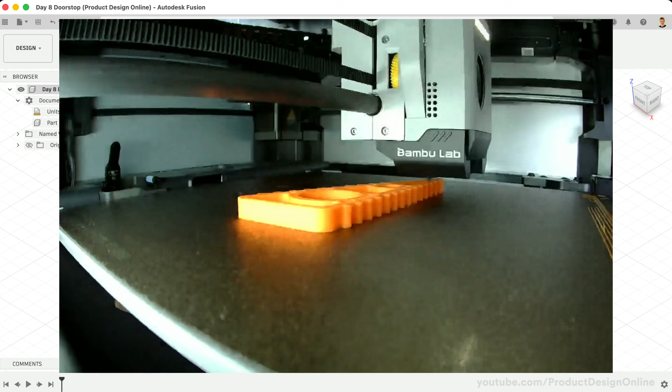When designing for 3D printing, always consider the orientation of your design. In our case, we'll print the doorstop on its side to allow the inner cavity to print without support material. Start a new sketch on the XY origin plane as you'll create the doorstop lying on its side.

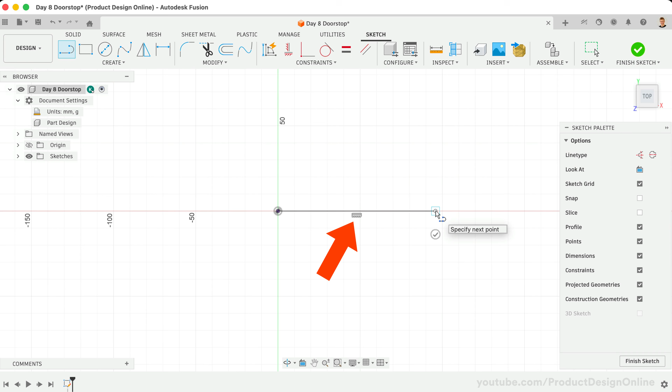Activate the line tool and start at the center origin. Sketch the first line running to the right and click where it snaps horizontally without defining a dimension. Sketch back to the green Y-axis. Notice if you start near the origin and move your mouse upward, Fusion helps you snap vertically from the origin. Click to place this line. Then click the origin to sketch the third line of the triangle.

Take note of the two automatic sketch constraints applied: a horizontal constraint on the first line and a perpendicular constraint at the corner. If you don't see these, manually apply the constraints.

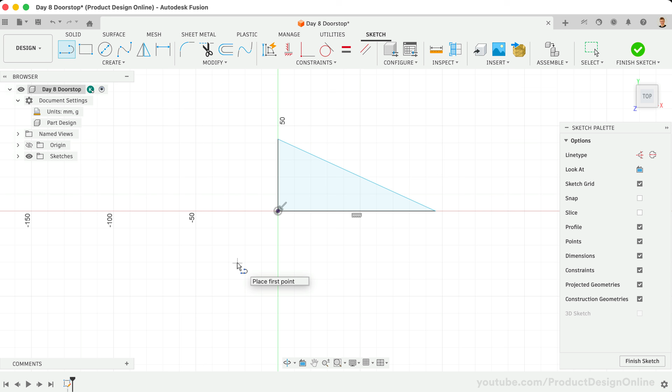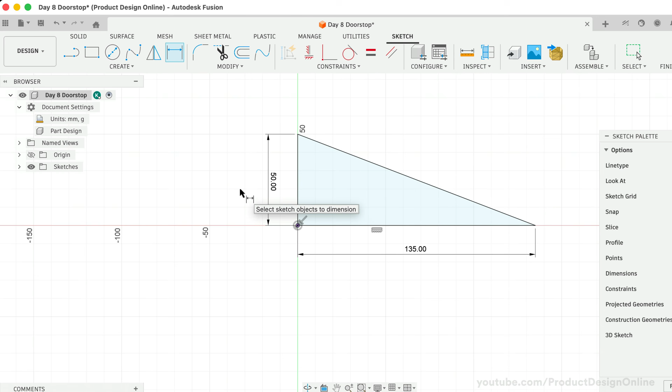Let's now fully define the sketch with dimensions. Press the shortcut D for dimension and select the bottom line. Click to place the dimension and define the length of the doorstop as 135 millimeters. Add a second dimension to the left, defining the overall height as 50 millimeters. The sketch is now fully defined. Double-check by finding the red lock icon in the browser.

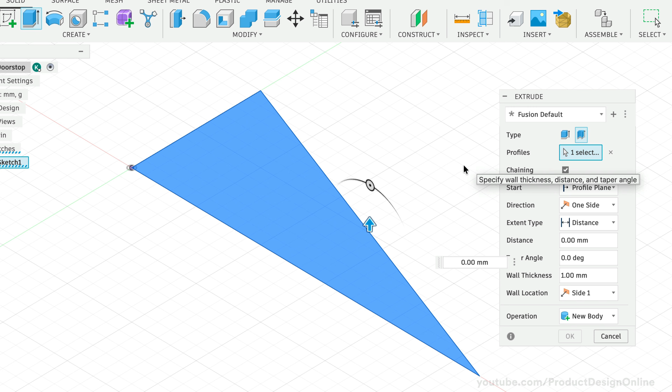Press the shortcut E to activate the Extrude tool. In the previous days of this course, you extruded closed profiles and shelled them to hollow them out. Today, switch to the Thin Extrude option in the dialog. Thin Extrude acts as a shortcut for creating walls or shelled structures. It transforms a simple 2D profile into a 3D feature with a defined wall thickness in one single step.

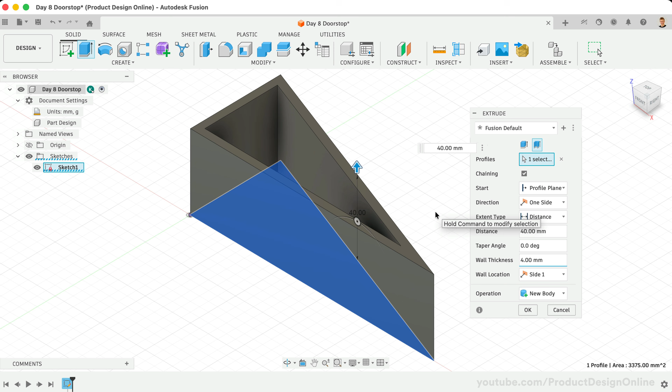Define the extrude distance as 40 millimeters. Notice the Thin Extrude includes a wall thickness in the dialog. Update the wall thickness to 4 millimeters. This provides a nice 3D printed wall thickness that resists breaking if someone steps on the doorstop. Click OK to save the extrude.

Notice you created the overall doorstop shape with a single sketch and single extrude versus using the shell command after the extrude. Use Thin Extrude for quick, simple walls built directly from a sketch, but stick with the shell command for complex 3D shapes where you need a uniform wall thickness across multiple faces.

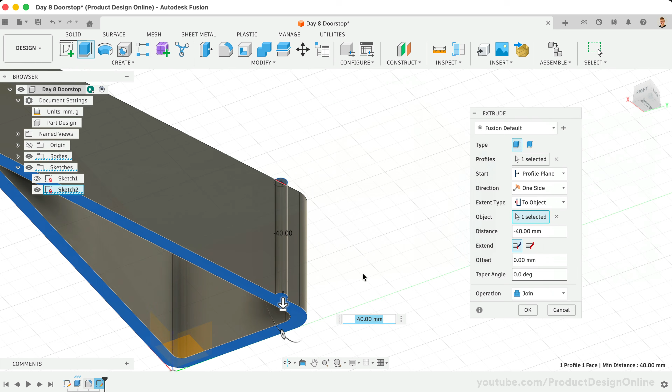To make the doorstop more usable, we'll sketch a grip on top, followed by the pattern on path to wrap it around the triangle. Let's first round over the sharp corner edges to create a continuous path to follow.

Activate Fillet from the toolbar and start by selecting the two inside edges on the left side. Rotate the model if it makes it easier to select the edges. Type 3 millimeters for the fillet radius. The fillet dialog allows you to add different fillets within the same tool.

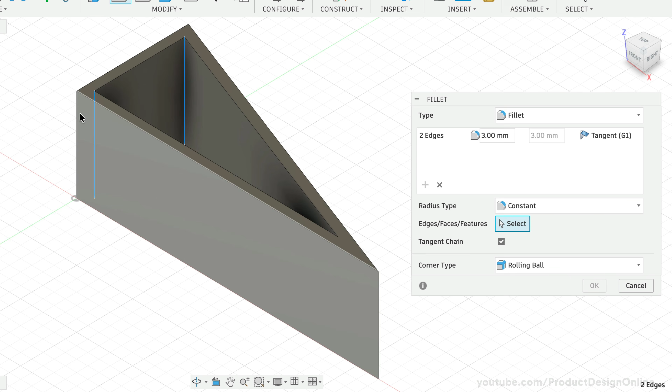Select the plus symbol to add a new selection set. This allows you to select the outer two edges separately, defining these as 6 millimeters.

Hold the Command key on macOS or the Control key on Windows if you happen to select the wrong edge or face. This allows you to deselect or select additional edges. You can also toggle between selection sets in the dialog.

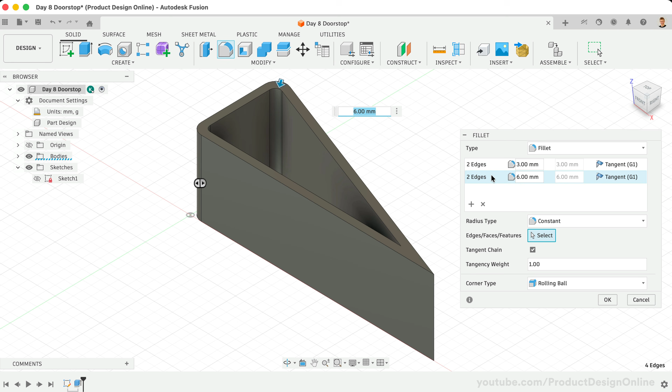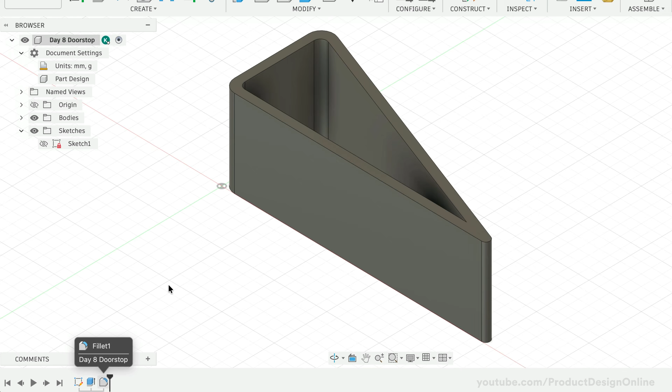Add a final selection set, selecting the front edge of the doorstop. This time, define a fillet radius of 2 millimeters. Click OK to save the fillet. Notice you have only a single fillet in the parametric timeline. Selection sets help you define multiple fillet radii without the need to use fillet multiple times.

Let's now sketch the first grip shape. Right-click on the top planar face and select Create Sketch. Activate the Circle tool from the toolbar.

Click anywhere out in space to start the circle and define the diameter as 4 millimeters before pressing Enter. The circle will still move freely.

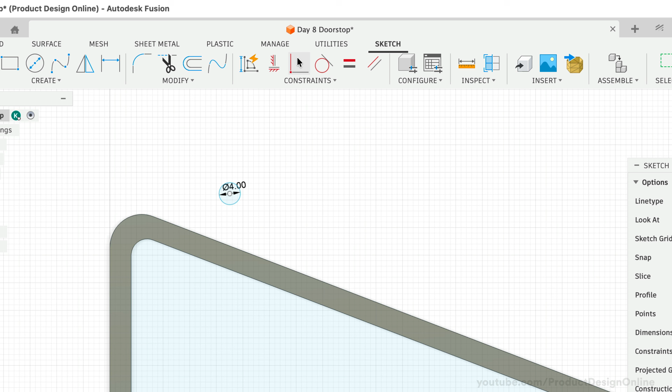Activate the coincident constraint. Use this to force the circle to snap to the top edge of the doorstop. Select the center point, followed by the top edge of the 3D body. Press Escape to clear the coincident constraint. Click and drag the circle. Notice the coincident constraint forces it to stay on this edge, though it still moves freely along the edge.

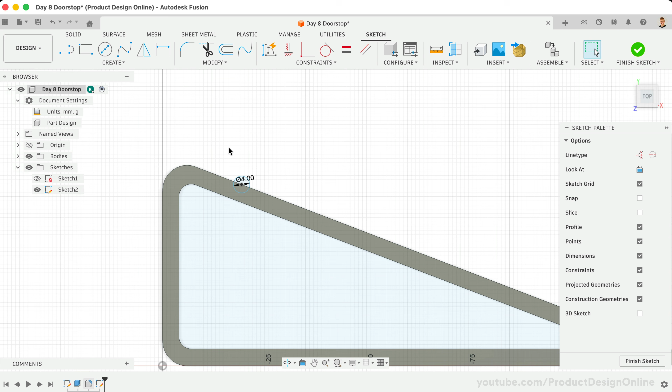Use the Sketch Dimension tool to fully define the sketch. Activate Sketch Dimension and click the center point of the circle, followed by the starting point of the top edge. Click to place the dimension and define the distance as 7 millimeters. You now have a fully defined sketch and don't have to worry about it moving.

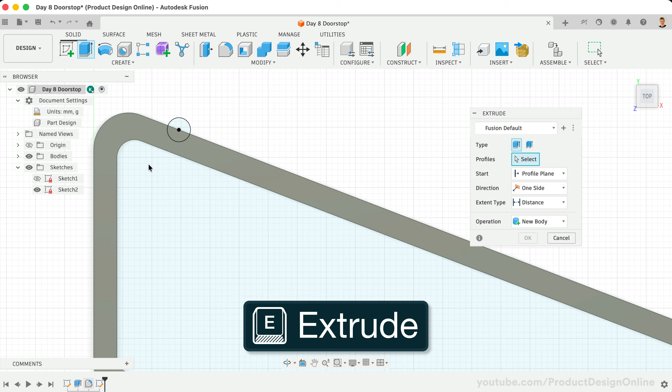Press the shortcut letter E for Extrude and select the top half of the circle. The 3D body automatically splits the circle profile in half.

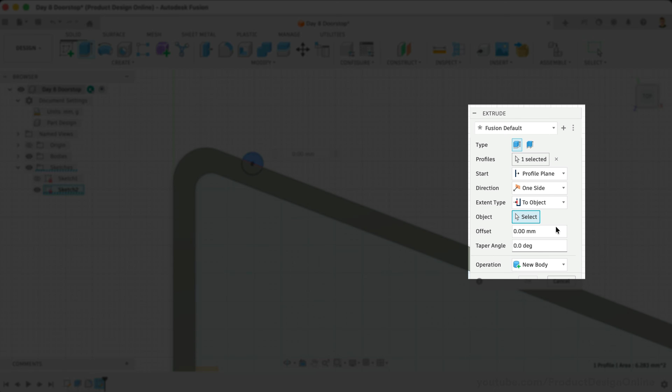When designing parametric models, there are many small settings that will help you build intelligence into your model. Here's a best practice in Fusion: instead of simply typing out the height of 40 millimeters, set the extent type as To Object. Rotate the model and select the opposite face as the object to extrude to. The second extrude feature then automatically adapts if you change the height in the first extrude.

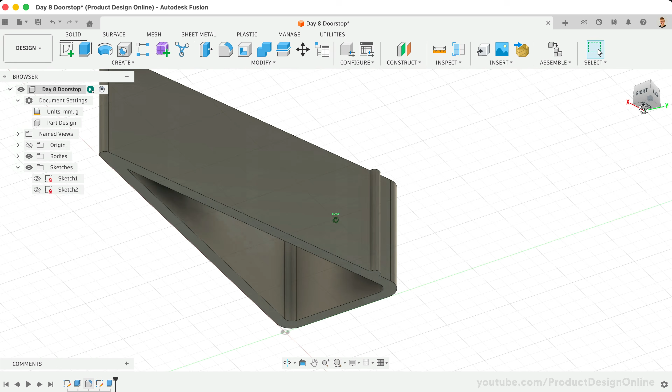Take note of the operation being set to join the existing 3D body before you click OK. Double-click the first extrude and change the height.

Notice the grip on top automatically adapts. Press Undo to revert the change. Activate the Rectangular Pattern tool from the toolbar. In the dialog, switch to the Pattern on Path type.

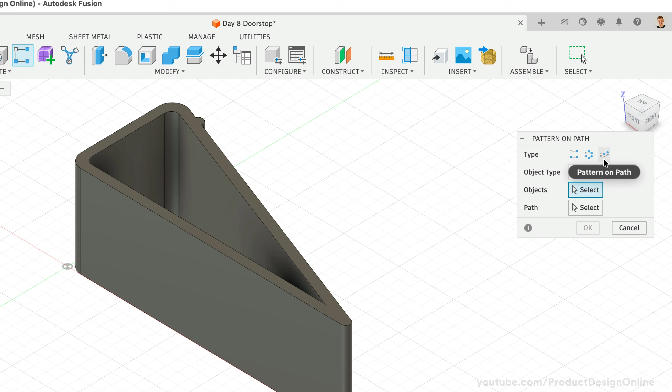This allows you to define an object and pattern it along a path, such as the outer contour of the triangle. Because you set the grip texture to join the existing 3D body, use the Faces object type. This will allow you to select the outer face of the grip. Switch to the Path selector and select the outer contour as the path. Click and drag the directional arrow to pattern the faces along the path.

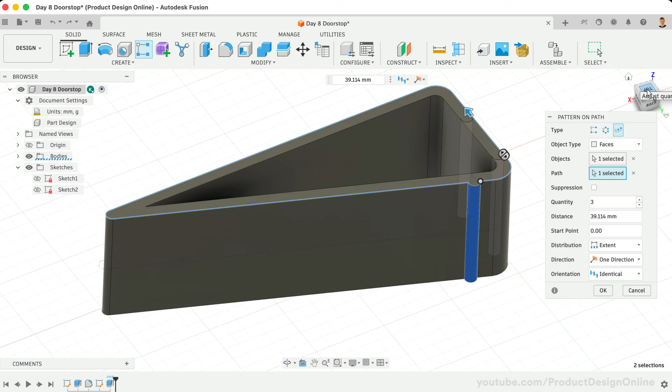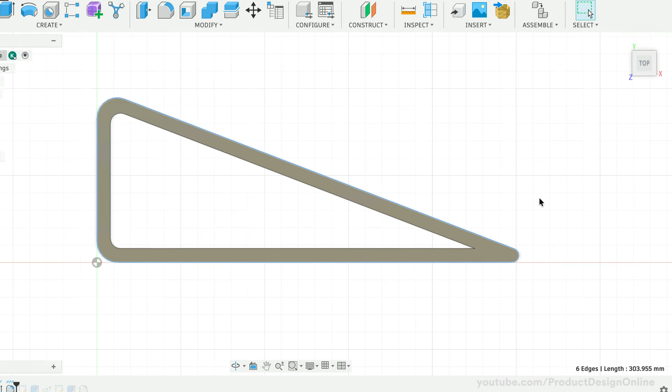This type of pattern often takes some trial and error to find the right numbers. Define the quantity as 40. With the distribution set to extent, define the entire length of the path. Here's a pro tip. You can find the length by shift-clicking all the path edges before you enter the Pattern tool. Fusion will then display the total length in the lower right corner. The total path distance is 303.955 millimeters. Notice the faces currently all match the original.

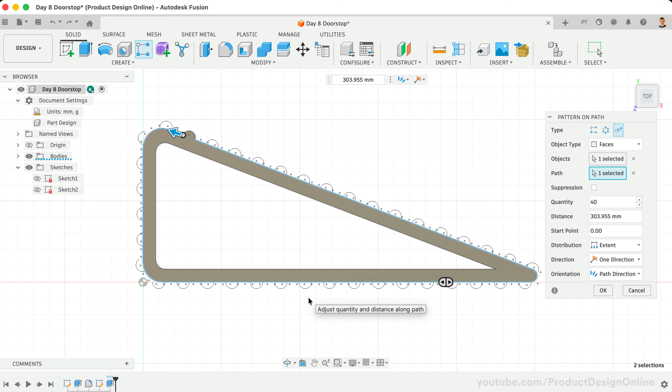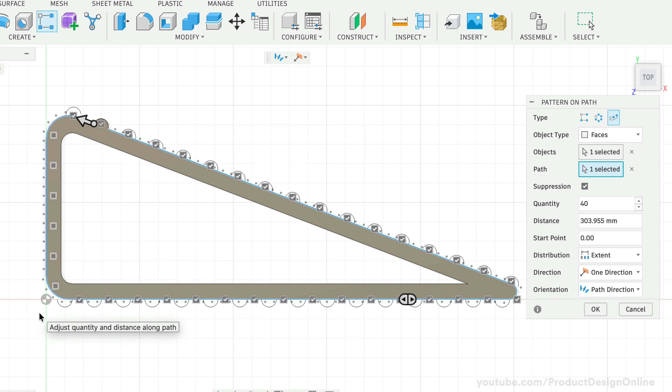To make them follow the path, switch the orientation from identical to path direction. This forces the object to follow the contour of the path. Here's another pro tip. Check the Suppression option in the dialog, as you don't need many of the patterns, including those on the height of the doorstop. This allows you to uncheck any instances that you want to exclude. Take a minute to uncheck all of them on the left side. Uncheck the ones that are too close to the corner edges as well. Click OK to save the pattern.

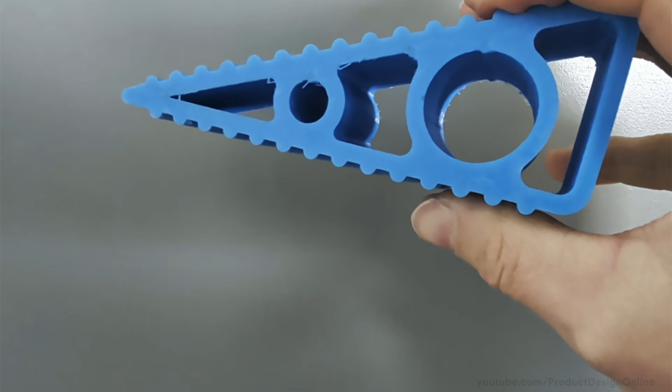A quick note: this design works best if you print it in TPU filament. Its unique combination of flexibility and high friction allows it to grip smooth floors while also absorbing impact without cracking. Experiment with the grip shape, using rounded shapes for hard floors or sharp triangles for carpet.

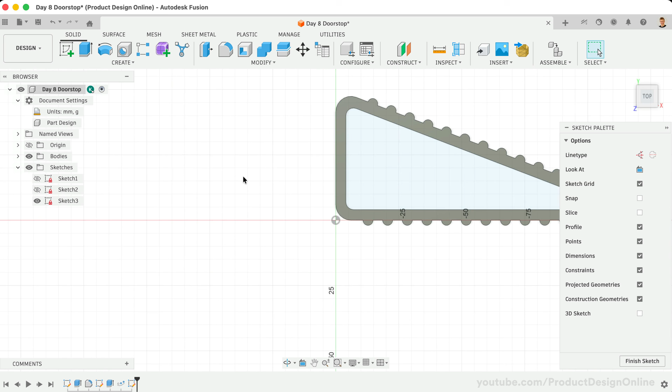Let's now add some final structure to the inside cavity. Right-click on the top face and select Create Sketch. Activate the Circle tool. Sketch a large 30 millimeter circle anywhere on the left. We'll constrain this in a second. With the circle still active, create a second circle with a diameter of 15 millimeters, clicking to place it anywhere on the right.

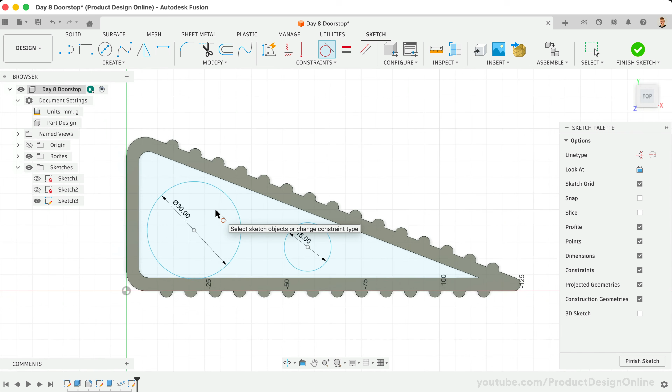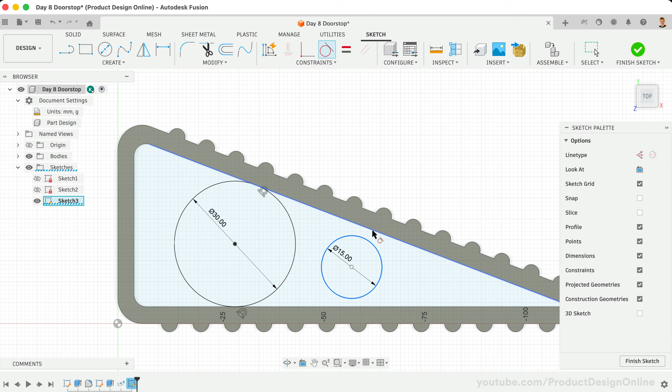Activate the Tangent Constraint tool. This allows you to force the circle to remain tangent with the inside edges. Select the larger circle and the top inside edge. Notice the tangent glyph, which shows the circle is now tangent to the inside edge. Click the circle again, followed by the bottom inside edge. This fully constrains the circle. Take a minute to repeat these steps to add tangent constraints to the 15 millimeter circle. This fully defines the sketch and ensures the circles don't move.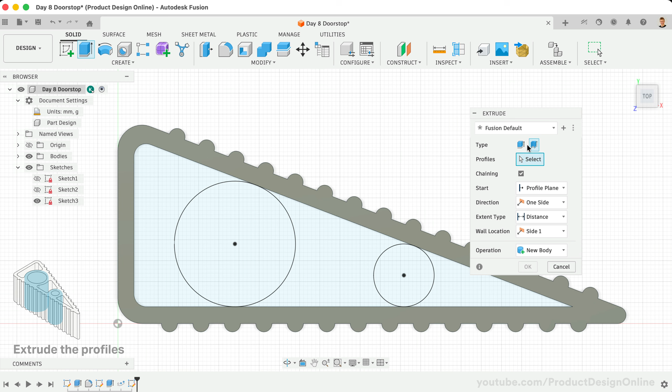Using a tangent constraint is better than adding a dimension to the edge. If the wall moves, the circles will stay touching the wall. Activate Extrude and once again switch to the Thin Extrude option in the dialog. Select both circle profiles. Very important, when using Thin Extrude, ensure you select the sketch geometry, the lines or curves, rather than the shaded area inside the profile. Similar to the grip pattern, use the To Object extent type. Select the bottom face as the extrusion target.

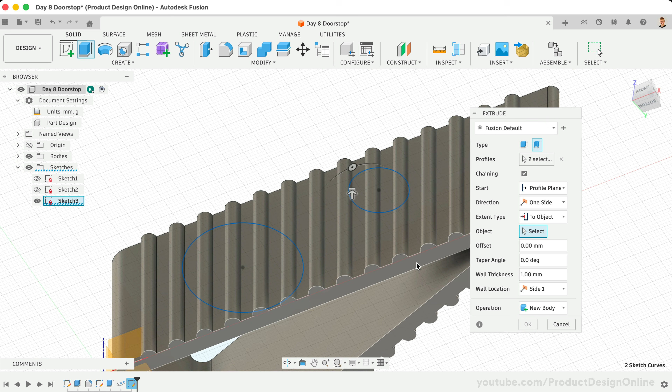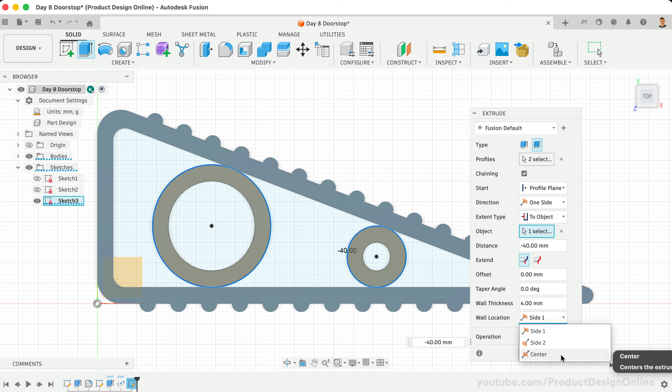Change the wall thickness to 4 mm to match the outer wall thickness. Notice, however, that the circle extrudes to the inside, so they just barely contact the inner walls of the triangle. In the Extrude dialog, change the wall location to the center option. This adds thickness on both sides of the selected profiles. Very important, a software bug may reset the extent type when you change the wall location.

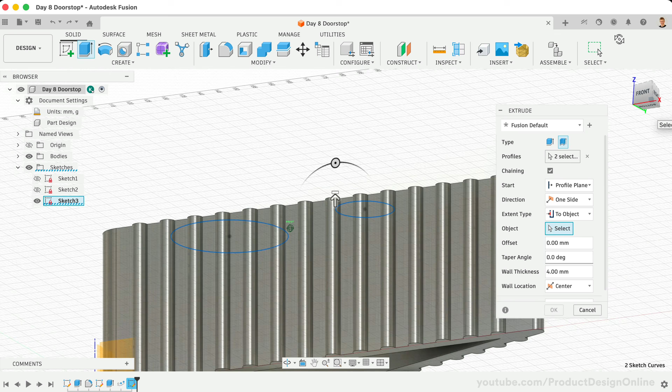First, set the operation to join to create a single body for 3D printing. Reset the extent type to To Object, then select the bottom face. Notice Fusion now applies the wall thickness to both sides of the circle profiles. Click OK to save the extrude.

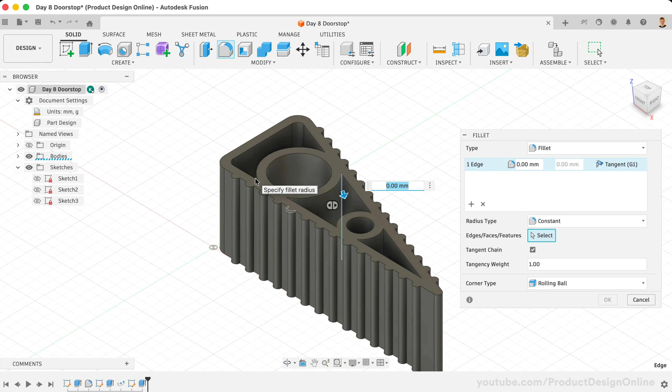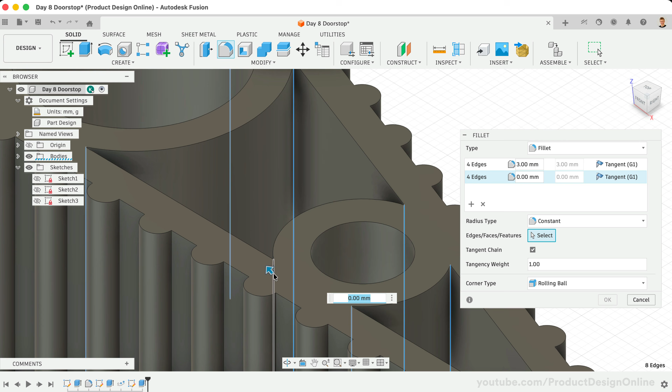Before exporting for 3D printing, add some final fillets to strengthen the connections where the circles meet the triangle. Activate Fillet and select the 4 inside connections where the larger circle meets the triangle. Define this fillet radius as 3 mm. Add a new selection set in the Fillet dialog. Repeat the steps for the smaller circle, but define this fillet radius as 2 mm. Click OK to save the fillet.

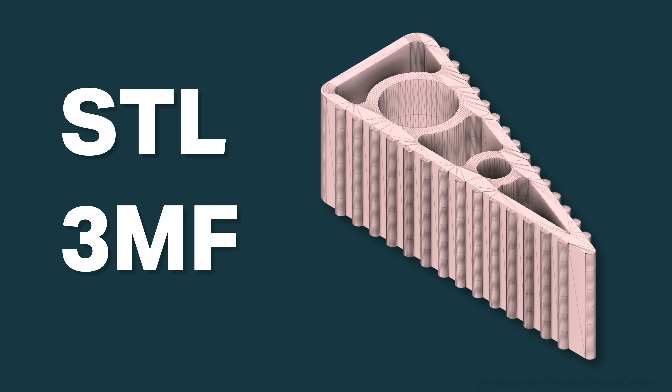Fusion supports many ways to export your models for 3D printing. Most slicers, including Bambu Studio, Prusa, and Cura, now support STEP files. While STL and 3MF files break your design into thousands of flat triangles, a STEP file preserves the original mathematical curves. This gives you perfectly smooth surfaces without any faceting and helps your slicer identify holes and other features for custom settings.

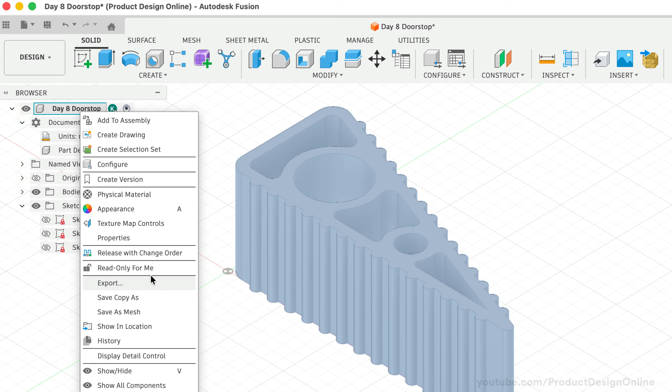Right-click the top-level part in the browser and select the Export option. Choose the STEP file type and save your design to your local hard drive. You can then open it in your preferred slicer program. I'll share recommended print settings on the resource page. You will also see the Save as Mesh option in the right-click menu. This allows you to send mesh files directly to your 3D printing slicer.